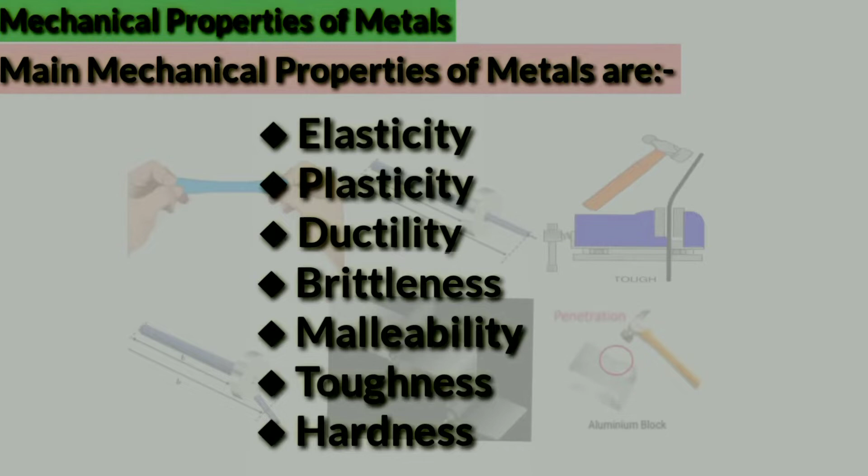Some main mechanical properties of metal are elasticity, plasticity, ductility, brittleness, malleability, toughness, and hardness. Now let's understand all these properties one by one.

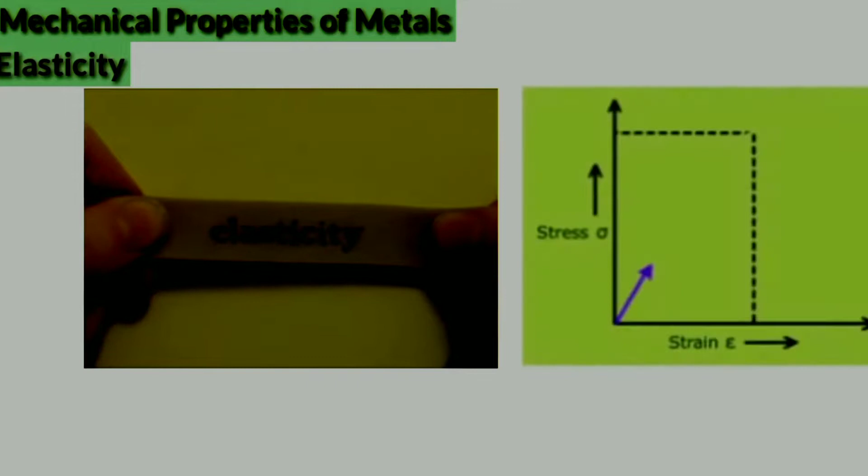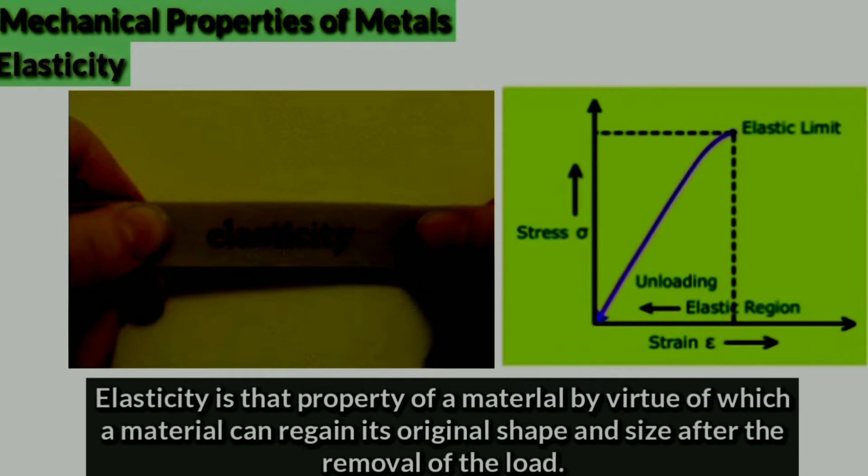Elasticity: to understand elasticity, let's take an example of a rubber band. When we stretch this rubber band, the shape gets deformed, and when we stop stretching it, it gets back its original shape and size. So elasticity is the property of a material by virtue of which it can regain its original shape and size after removal of load. In a stress versus strain diagram, within the elastic limit, the loading and unloading curve will follow the same path.

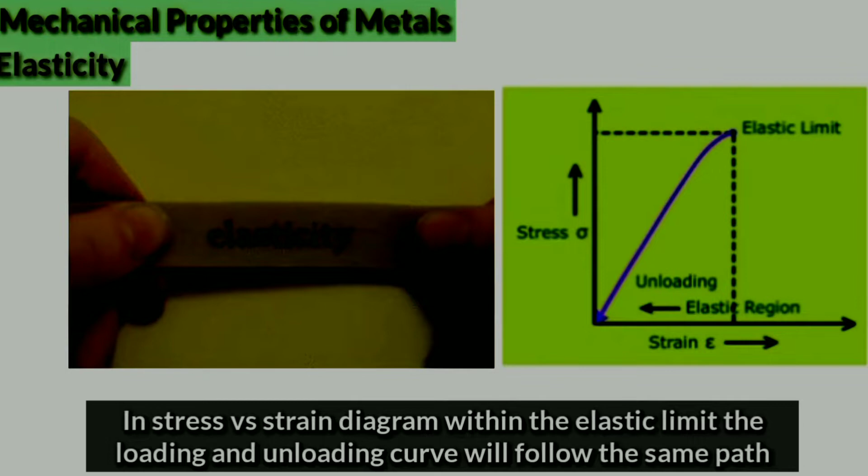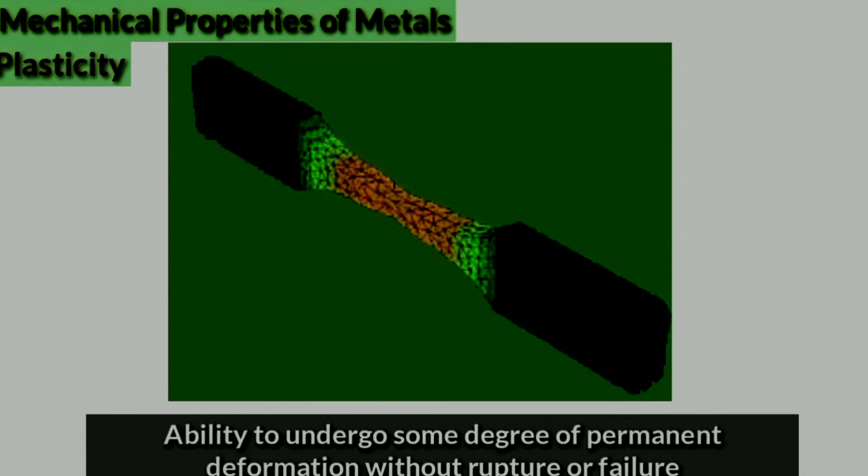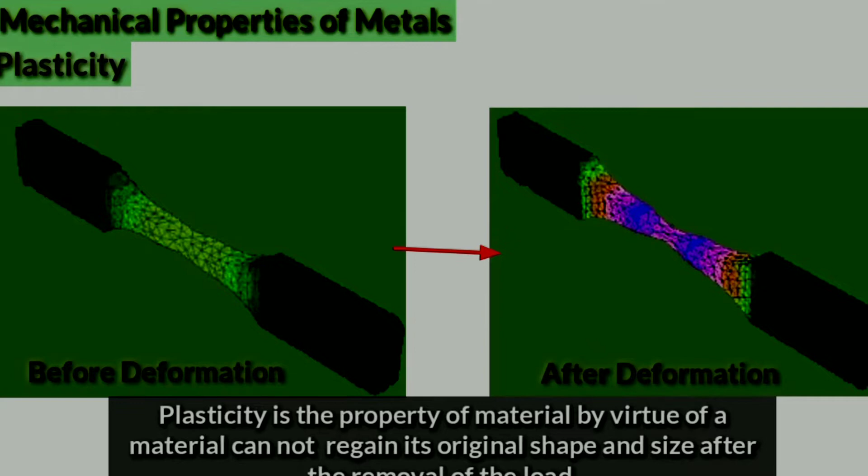Plasticity is the reverse of elasticity. The plasticity of a material is its ability to undergo some degree of permanent deformation without rupture or failure. So plasticity is the property of a material by virtue of which it cannot regain its original shape and size after removal of load. In the stress versus strain diagram, after the elastic limit, the loading and unloading curve will not follow the same path.

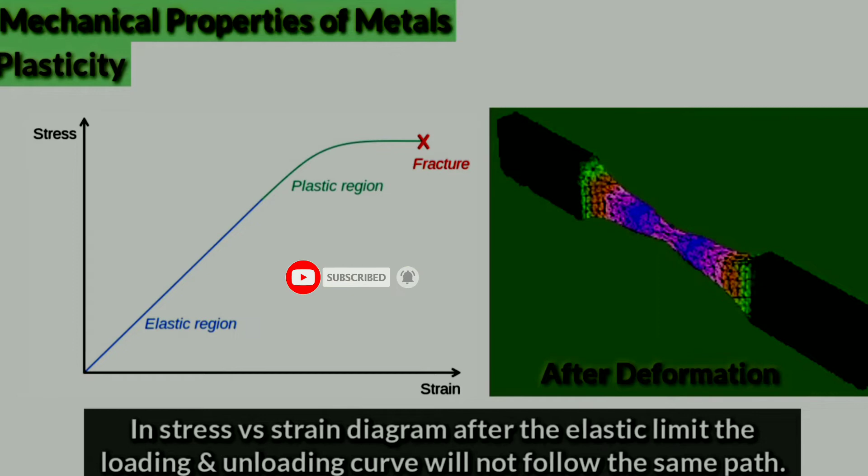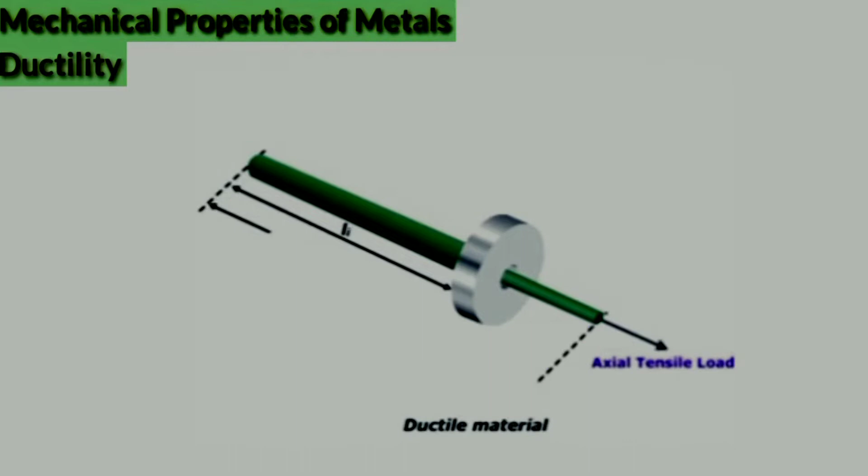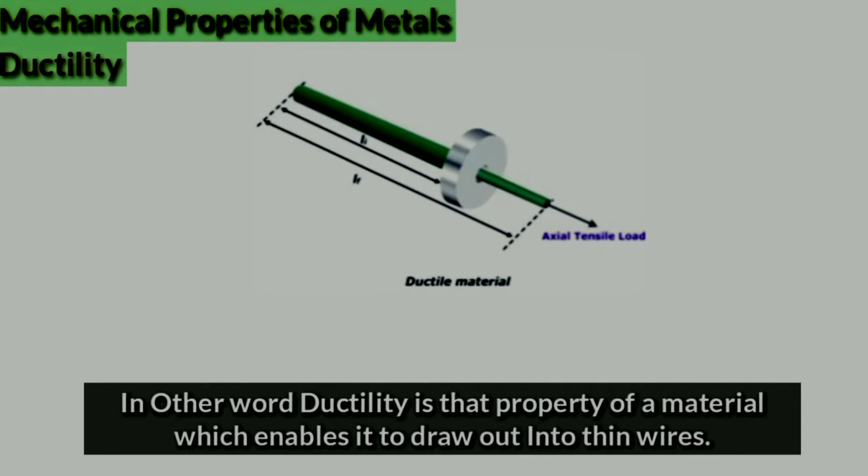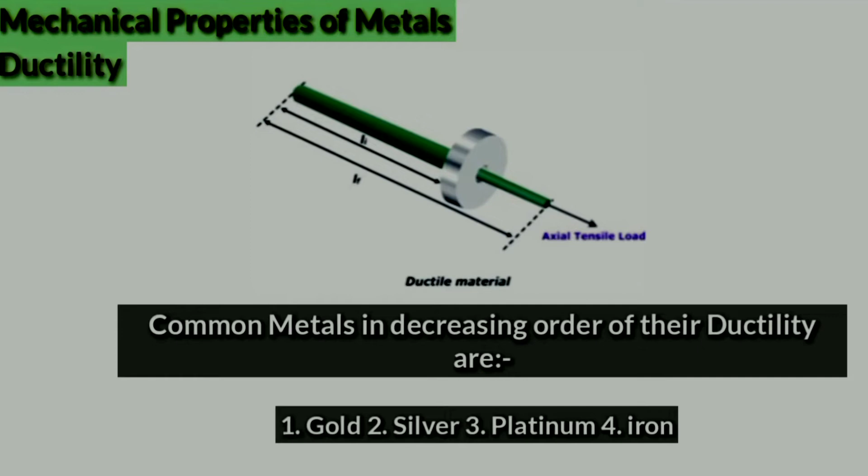Ductility: to understand ductility, let's take a metallic bar. This metallic bar, when subjected to axial tensile load, can be drawn into a wire. So ductility is the ability of a metal to withstand elongation under tension without rupture, or in other words, it is the property of material which enables it to be drawn out into thin wire. Common metals in decreasing order of ductility are gold, silver, platinum, and iron.

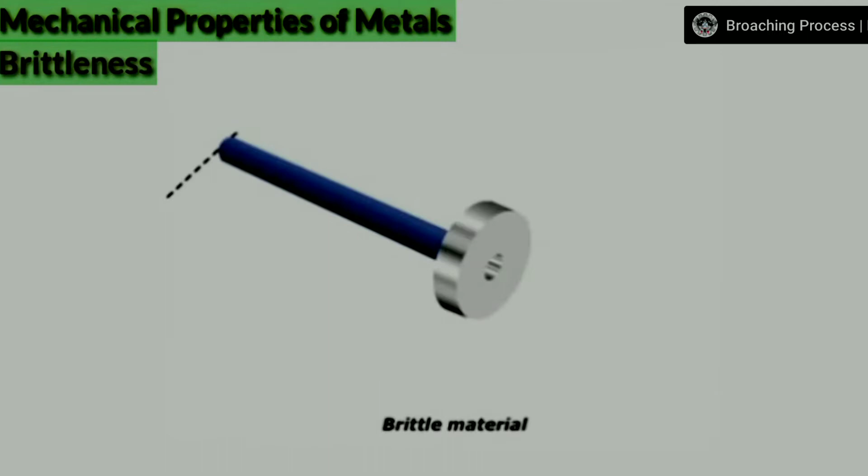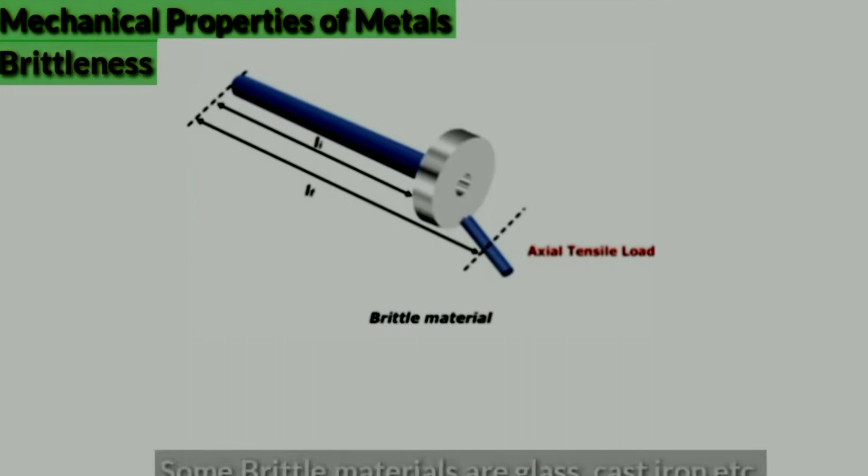Brittleness: lack of ductility is brittleness. To understand brittleness, let's take another metallic bar. When subjected to axial tensile load, we notice that the bar does not elongate and fails. So brittleness of a metal is the property of breaking without much permanent distortion. Some brittle materials are glass, cast iron, etc.

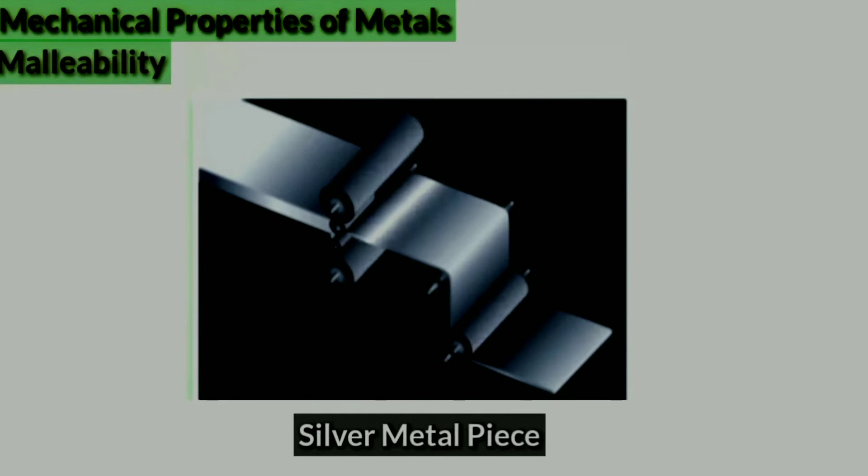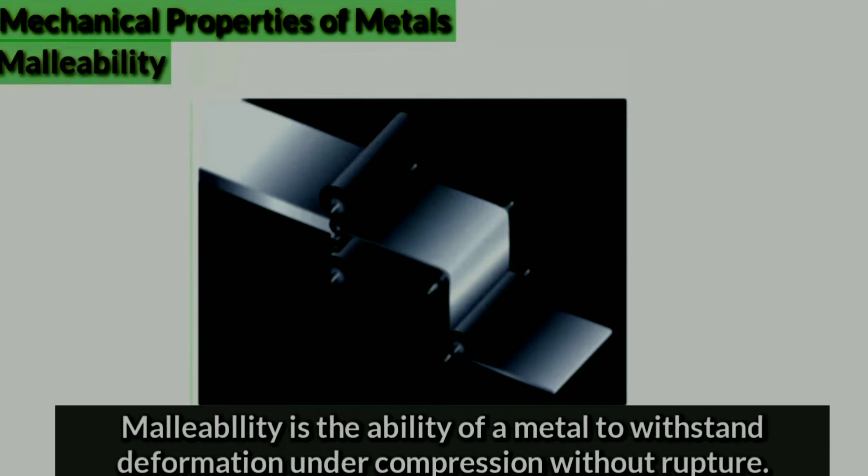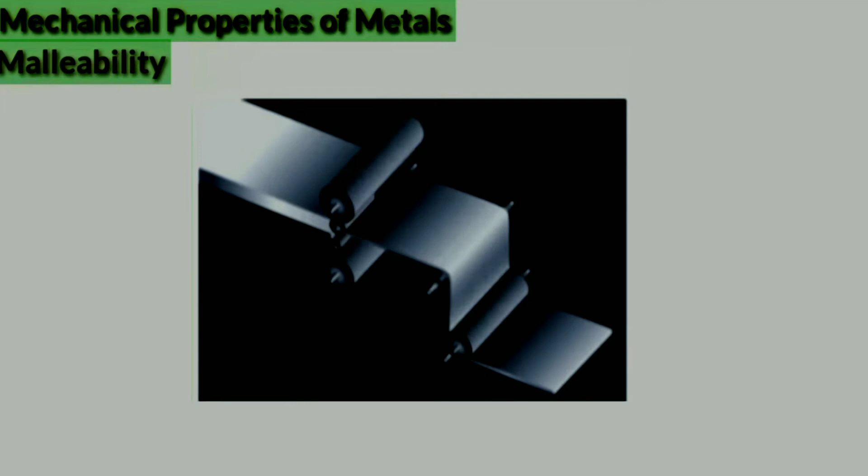Malleability: to understand malleability, let's take an example of a silver metal piece. When we pass this silver metal piece through a roller, it gets deformed into a thin sheet due to the compressive load applied by the roller. So malleability is the ability of a metal to withstand deformation under compression without rupture, or in other words, it is the property of material by virtue of which it can be rolled out into a sheet without rupture. This property generally increases with increase in temperature. Common metals in decreasing order of malleability are gold, silver, copper, and aluminium.

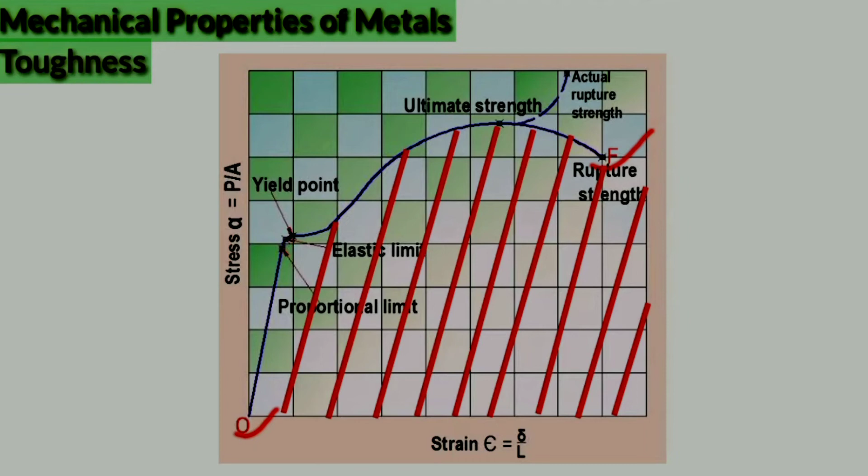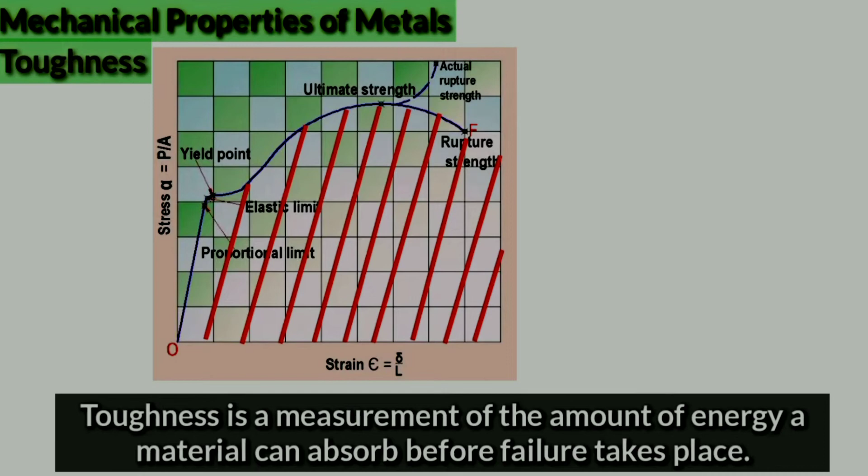Toughness: to understand toughness, let's take a stress strain curve for a ductile material. In the figure, from point O to F, the shaded portion indicates the energy absorption capacity of the material before fracture. So toughness is the measurement of the amount of energy a material can absorb before failure takes place. The toughness of a metal is expressed as energy absorbed. Toughness is related to impact strength, that is, resistance to shock loading.

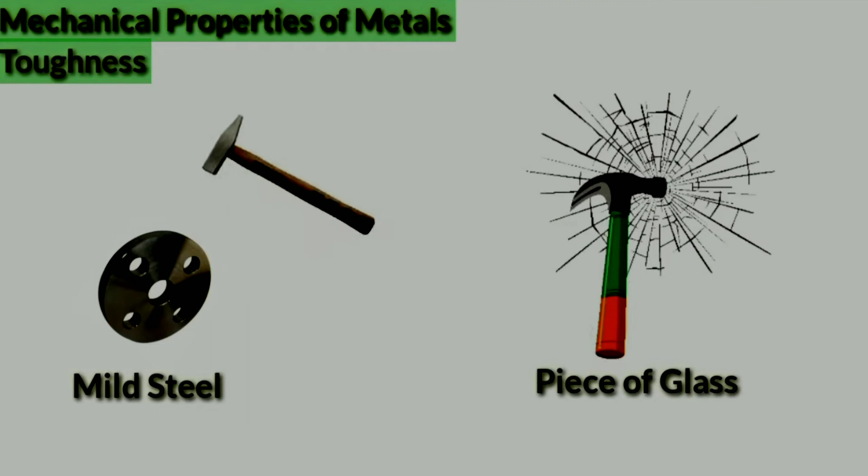For example, if a load is suddenly applied to a piece of mild steel and then to a piece of glass, the mild steel will absorb much more energy before failure takes place. So mild steel is tougher than glass.

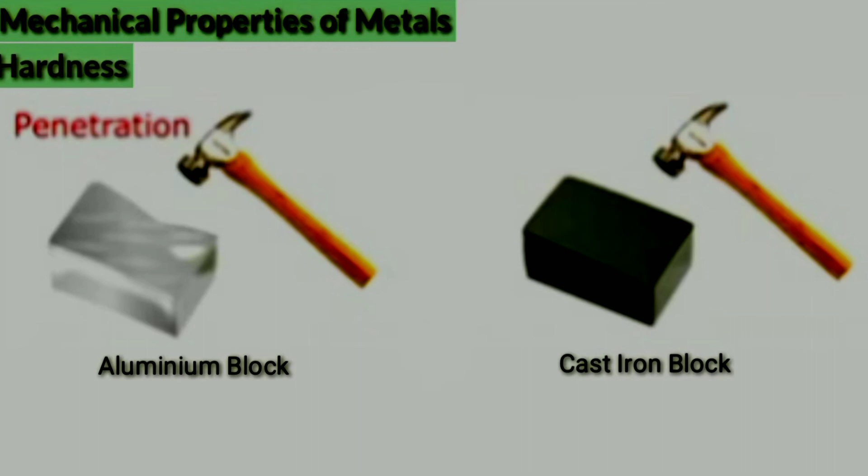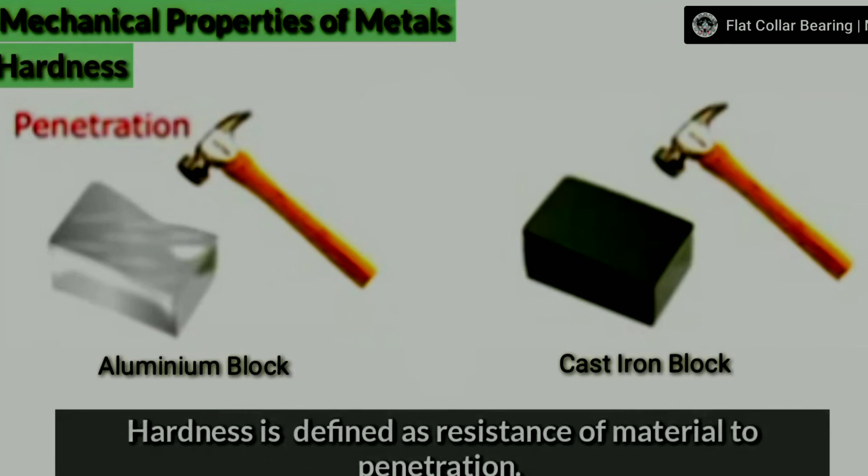Hardness: to understand hardness, let's take an aluminium block and a cast iron block. When we apply some amount of pressure or impact on both, we see there is a penetration mark on the aluminium block but not on the cast iron block. This is because cast iron is harder than aluminium. So hardness is defined as the resistance of a material to penetration.

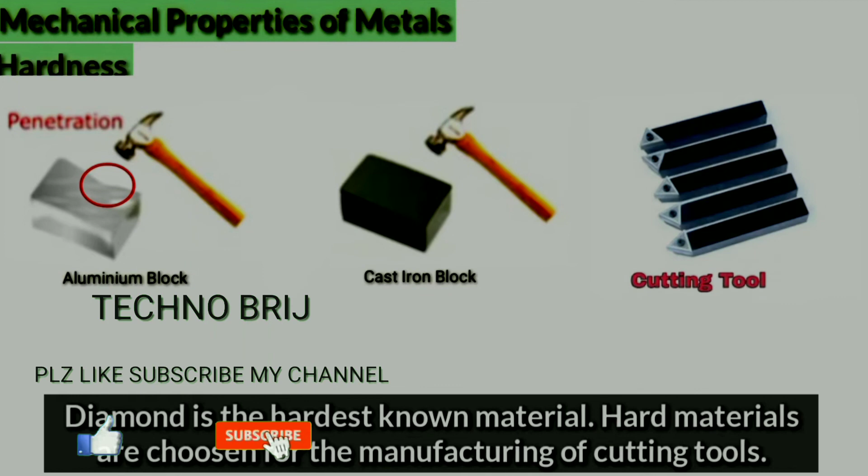Diamond is the hardest known material. Hard materials are chosen for the manufacturing of cutting tools. Hardness of any metal is tested by various methods, like the Rockwell hardness test.